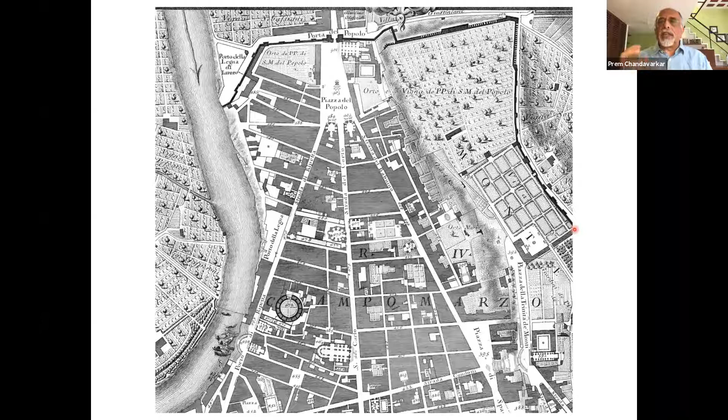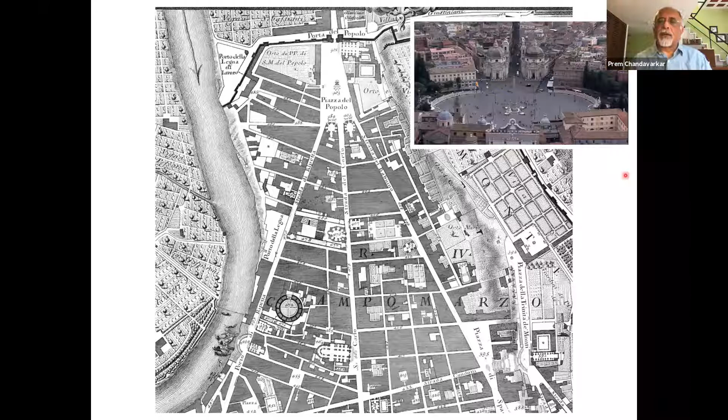So this is just an aerial view—those are the three roads you see. Later on, Pope Sixtus V, in the second half of the 16th century, started constructing obelisks at these major junctions to emphasize them further. So there was an idea of a grand street focusing on something of significance.

Now this went through another change initiated by the Protestant Reformation, which argued that the church had become a corrupting influence, that civilization had become a corrupting influence, and it was necessary to go back to humanity's original state before that corrupting influence took hold. So the Bible, which had so far been printed mainly in Latin, was translated into common languages. There's this notion of the Garden of Eden as a symbol of that original happy state. So this notion of nature representing this original state started to come in, and landscape design became a huge component in urban design.

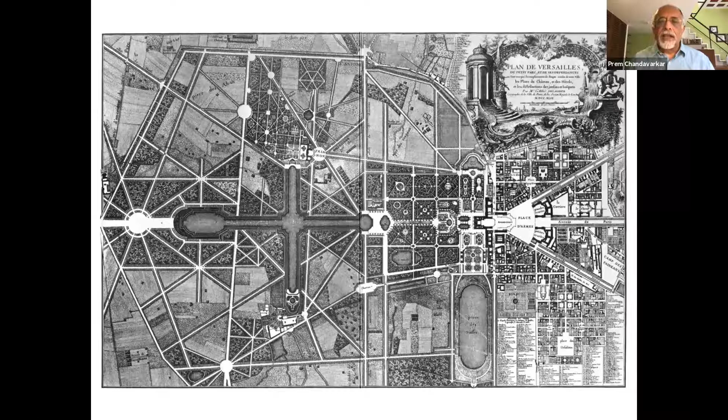Now, one of the grand urban axes, the first that set a precedent, was the Avenue des Champs-Élysées in Paris. This had emerged by the mid to late 18th century as a fashionable avenue that grew from the Louvre, which is currently a museum but was originally a palace, with a set of gardens in front. This axis had grown as a tree-lined boulevard, and it was quite well established.

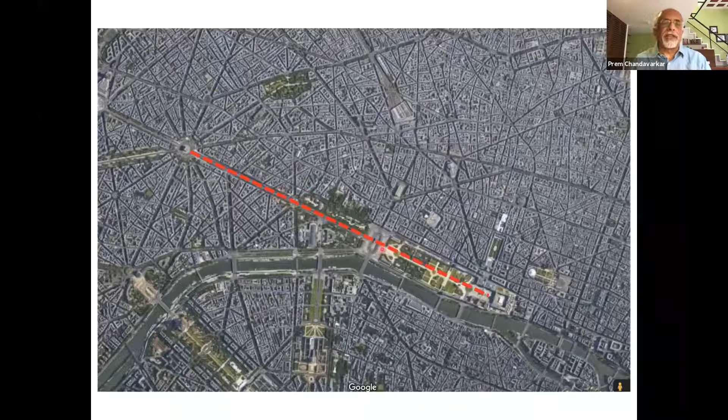But there was an intervention in Paris in the mid-19th century, commissioned by Napoleon III and designed by Baron Haussmann, who carved a set of boulevards into the heart of medieval Paris. This had two functions: one was to create this emphasis on monuments, which had become an established aspect of urban design; but it also made the movement of troops through the city for stronger control easier. This is the Champs-Élysées, and what Haussmann created was a major junction at the west end of it, with a whole set of radiating roads that had not existed before.

So that's a view of the Champs-Élysées. And if you look at what had happened, you had the emergence of the Grand Avenue, which had happened earlier, coming from the Louvre and the gardens.

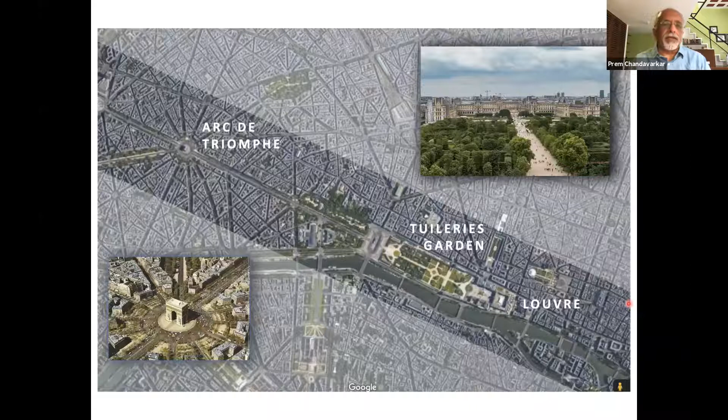But at the other end, in the early 19th century, a triumphal arch as a military monument to commemorate the people who had died in the French Revolution wars and the Napoleonic Wars was constructed at this junction created by Haussmann. So the idea of this bracketing of this grand boulevard with two edifices, at one end a palace or something that symbolizes governance, and at the other end a monument that arouses patriotic sentiment, was created. This set the precedent of the grand urban axis, bracketed by these two kinds of nationalist fervor edifices. And this was what dominated the making of capital cities from the late 19th century onwards until the ideals of the modern movement took over in the mid 20th century.

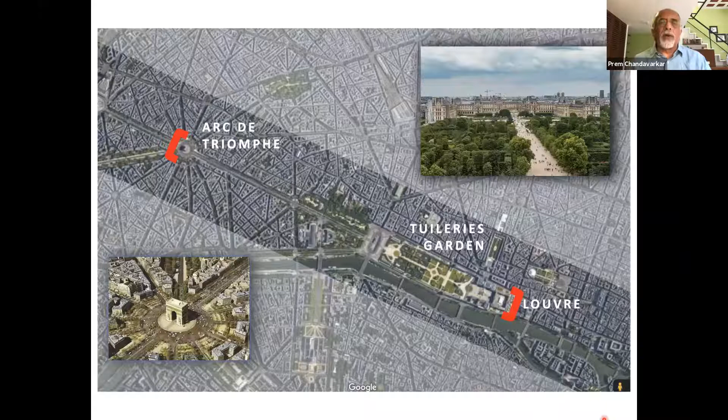The impact of the Athens Charter in the mid-30s, it started to prevail, and things changed. But the period we are going to look at here is the first half of the 20th century. And to do the comparison, I'm going to look at three grand urban axes in capital cities.

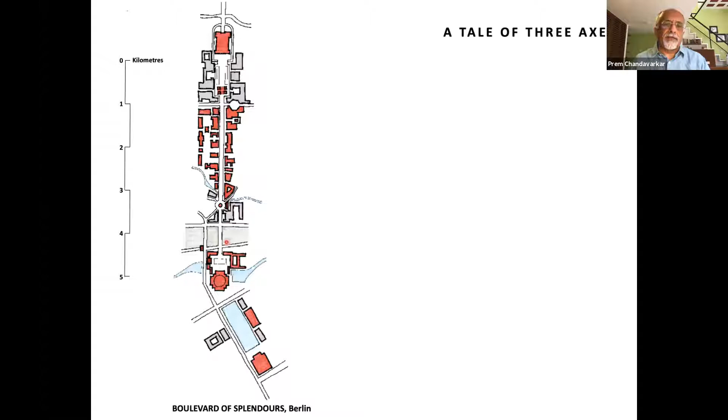The first is an axis that was never built. It was Hitler's plan to remake Berlin as Germania, which would be the grand capital of the Nazi Empire, and which would be a 7.5 kilometer long axis that would connect two new train stations. But the core of the axis was this stretch here from a triumphal arch to this domed structure.

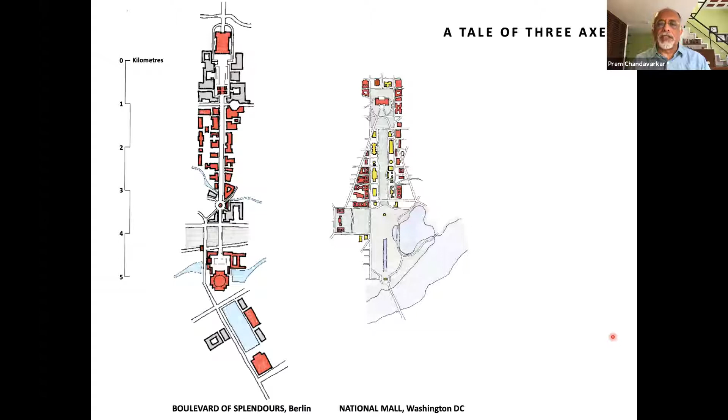The second is the National Mall in Washington, DC, particularly the way it was remade in the early 20th century. And the third is Central Vista, which was designed around 1913-14.

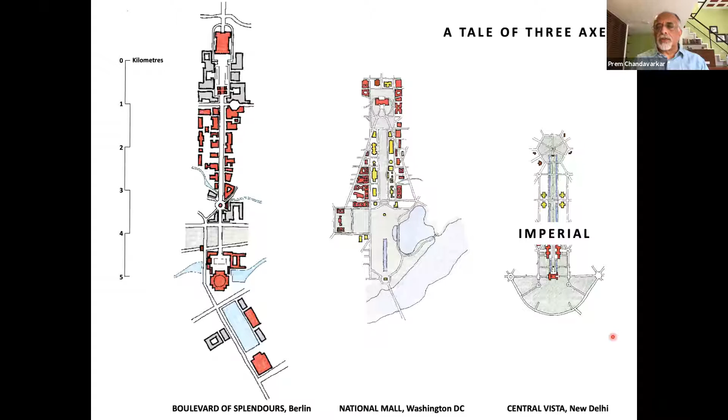So we look at these three axes. And the interesting thing is they come from radically different political regimes. Central Vista was originally an imperial project. National Mall was constructed under a democratic regime, and the Boulevard of Splendor springs from a fascist regime.

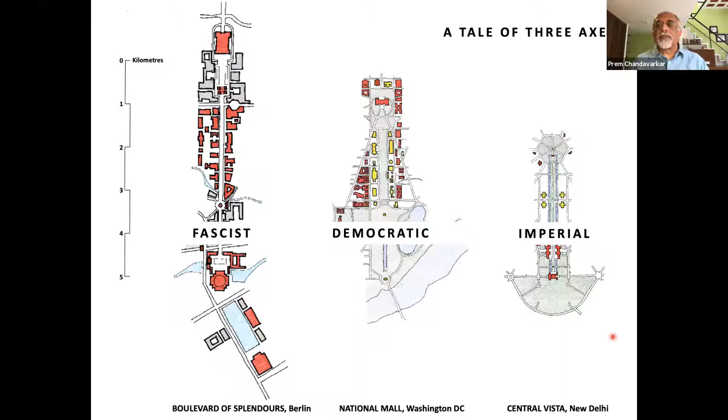Now, how is it the same urban type can be deployed for such different political ends? This is not in the nature of the type itself as a grand boulevard with focal elements, but how the constituents of that type are assembled and how they relate to each other. So for this analysis, we look at three aspects of the grand urban axis: what the focal elements are, what the edges are, and what the center of the axis is.

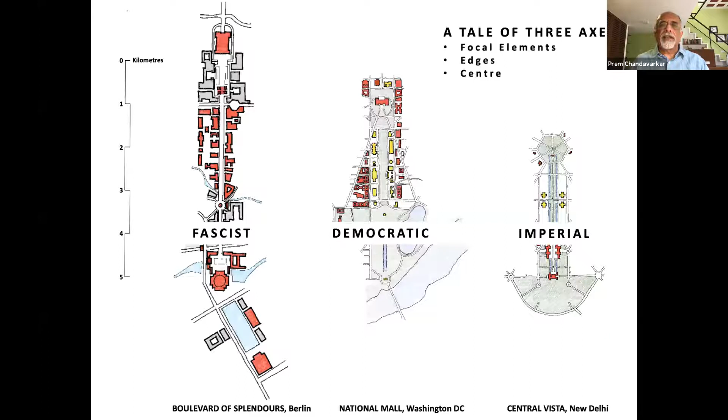So starting with the Boulevard of Splendors in Berlin. And that's the plan. This project was never realized because it had to be put in suspension at the start of the war, and then Germany's defeat in the war ensured that the project never saw the light of day. The only part of the project that was realized was the upgrading of Charlottenburger Chaussee into a grand avenue that terminated at a historical gate to the city, the Brandenburg Gate. And this street still exists in its upgraded form. But the rest of the project never happened.

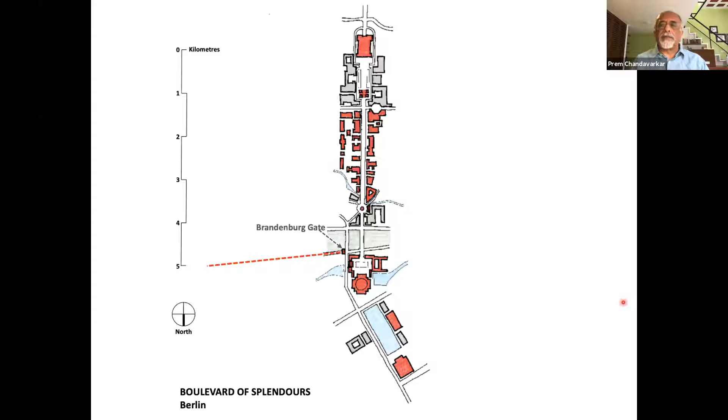So let's look at the focal elements. At the north end, and I'm going to look first at this core part of the axis, was this domed structure called the Volkshalle, the People's Hall. You don't realize the scale of it from this plan, but it was a massive structure, and the dome contained a space which was large enough to host an audience of 180,000 people.

The tip of the dome would have been 300 meters above the ground. It would have enclosed a volume that is 16 times that of St. Peter's Basilica in Rome. And if it had been built, it would still have been the largest single volume institution in the world.

The foreground for the dome, for the Volkshalle, is a huge square which was called the Great Square, which actually bridges over the Spree River. And there's a series of buildings that encircle this, the primary one being Hitler's Chancellery, and then the flanking buildings that flank either side of the entrance to the Great Square are the Wehrmacht, the Unified Armed Forces headquarters. And there was an earlier parliament building, the Reichstag, which is incorporated into this.

There's a garden immediately in front, and that's also an interesting gesture. Actually, the garden was there on the eastern side, but it was extended across. And this garden also still exists. In a way, there's a distancing between the source of authority and the rest of the axis, which sort of indicates that the authority is almost divine, is like one step above, away from the rest of society.

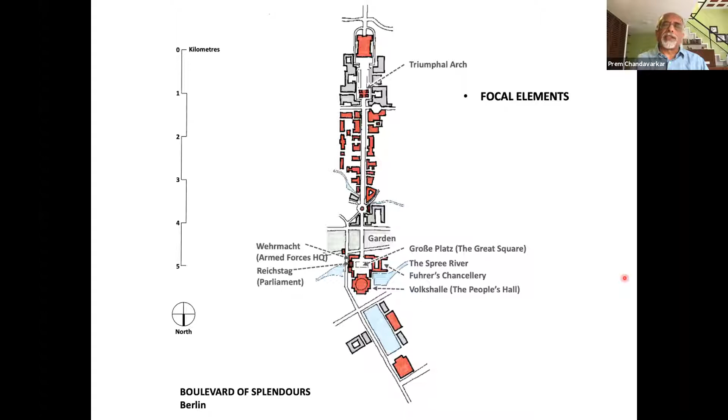The axis extends beyond on either side. On this side of the arch is a plaza of war victories designed to display large armaments captured during conquest. Then there is the South Station here. On the north, between the North Station and the Volkshalle, is a great pool, a huge, massive reflecting pool, so people exiting North Station from this side could get a double emphasis of the Volkshalle, seeing both the actual structure and its reflection. On this side is the City Hall.

If you look at the edges, it is constituted completely by government buildings. The core part of the axis is ministerial offices, and even these other buildings are all either buildings of government or of the military. The only public institution is the tourism center, and even that is a government entity, because propaganda through tourism was a key part of the Nazi machine, and this would inculcate people in the grandeur of the space. The location of the tourism center in front of the Soldiers' Memorial is significant.

If I look at the center, it is this boulevard, which is actually pedestrianized. Traffic is diverted into an underground tunnel. The military parades with a synchronized rhythm of jackbooted soldiers marching, that spectacle was a key part of Nazi propaganda, so this is basically what this was designed for. So even traffic was kept out of it, so you could really capture this in all of its splendor.

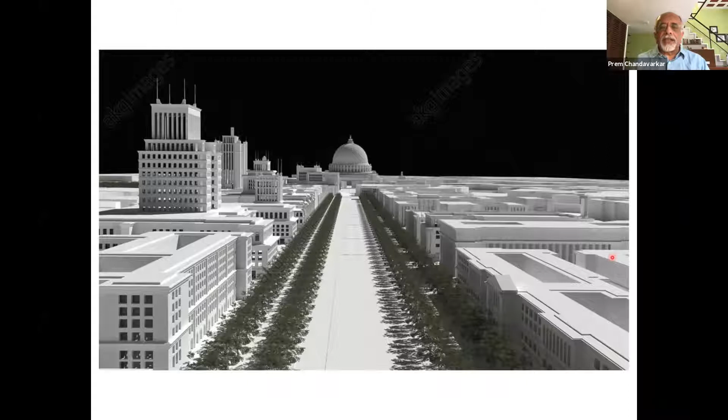You can imagine the grandeur of this thing, the immense scale, and the fact that it is completely lined by the buildings of state, of government. Clearly the intention here is to construct the spectacle of the state at a scale where the ordinary citizen is struck mute with awe looking at the grandeur of this. And the fact that they're struck mute with awe is something that they can take pride in, that they are citizens of that state. So it's a curious phenomenon of making the person proud but mute at the same time.

So let's come to the National Mall in Washington, DC. An idea of the mall was part of the original plan, but it was fundamentally reshaped. It was one of the boulevards slightly above the others, but it wasn't bracketed. It just went into the river as a focus. The idea of it being bracketed as a grand urban axis came only later.

This came from a plan released in 1902 by the McMillan Commission, officially called the Report of the Senate Park Commission. The McMillan Commission was chaired by Senator James McMillan, but he pulled in a who's who of architecture, design, and art. He had Daniel Burnham and Charles McKim of the firm McKim, Mead and White, who were the preeminent architects of the US, Frederick Law Olmsted, who was a preeminent landscape architect famous for designing Central Park in New York City, a highly reputed sculptor, Augustus Saint-Gaudens, and Charles Moore, who was Senator McMillan's chief of staff, became the secretary to the commission.

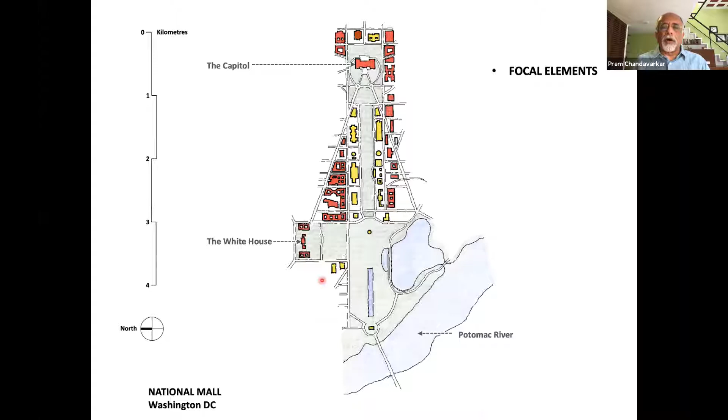So this is the plan. And if I look at focal elements, the focal element towards the east is the Capitol building, the legislature of the United States, which contains the houses of Congress and Senate. And it is interesting to note that the focus is on the legislature and executive authority is displaced to one side. The White House, which is the office and residence of the president, is on the mall, but is displaced off the axis. And the focus is on the legislature.

Beyond the Capitol building is another plaza, and closing off the east edge of that plaza are the Supreme Court and the Library of Congress. So one could say that the mall towards the east focuses on the triumvirate of legislative debate, justice, and knowledge.

On the western end, the focus is not a military memorial. It's a pavilion that commemorates Abraham Lincoln for having steered the nation through one of its most difficult passages in history, the American Civil War, where he managed to preserve the integrity of the Union of States while managing to abolish slavery, which was not an easy task at all.

Now let's get to the edges. At this section, all these buildings marked in yellow are all public institutions and containing art galleries plus some of the great museums of the world, the Smithsonian and many others. And this was actually a very deliberate gesture.

And there was a setback rule saying that no federal office building could come within 300 feet of the mall. And all of the federal office buildings are pushed beyond the 300 feet setback. And the idea for this is that as a democracy, it is the people who must be foregrounded and the government who are in the background. That is why the buildings need to be set back.

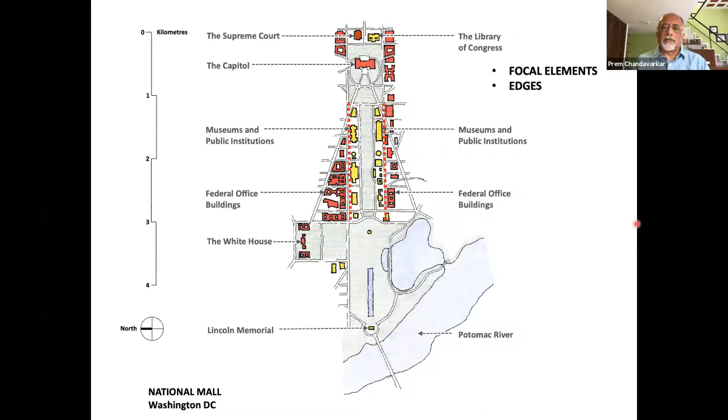There was a fight. The Department of Agriculture had supporters in Congress. The fight went all the way up to President Theodore Roosevelt, who finally supported what the government was aiming to achieve. And eventually the agriculture building was maintained, respected the 300-foot setback, and part of it was taken below ground so that it could be built within the height limit.

Now, the center is not a road for military parades, as has been the case in other grand urban axes. It is a park. And it's not even a park that belongs to the city. It's a designated national park and comes under the park services. It's called the National Mall and Memorial Parks.

And this park, to understand the importance of this park, one must look at what Jane Jacobs has written about parks. And she contests the old adage that the park is the lung of the city. She says the lungs of the city are the sort of 1 mile of atmosphere above the city. And it's not that parks breathe life into the city, it's actually the city that breathes life into parks. And she does a study of parks in New York City to show that where the park is surrounded by uses whose patterns change across the day, and there are continuously people going in and out of them, the park is lively.

Where it's surrounded by office buildings, where most people are indoors during the day, they desert the buildings outside working hours, then the park is not lively. If it's used at all, it's used during good weather, during lunchtime. But eventually it starts to decay and gets captured by crime and other forces of decadence. So you have to think about how you breathe life into a park.

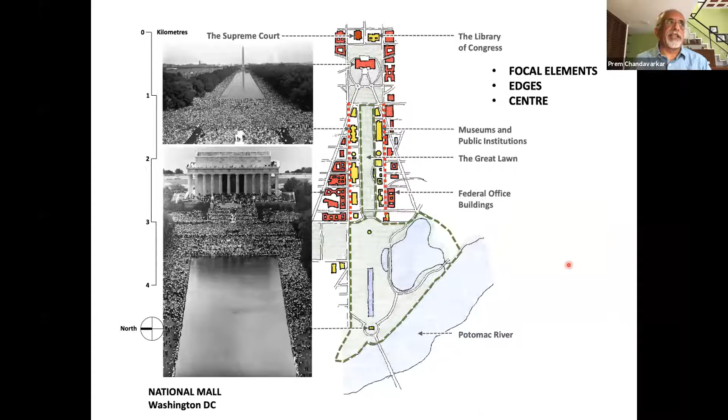This becomes a site of popular public protest, and that still happens today. There have been many public protests, but perhaps one of the most significant was the Great March on Washington in 1963 to fight racism, where Martin Luther King made his famous 'I Have a Dream' speech calling for the end of racism. This is an event that was significant enough that it's believed to have played a role in the eventual passage of the Civil Rights Act of 1964. So it's an epoch-making space.

The park has 3 segments. The middle segment is a tall obelisk, the Washington Monument, commemorating the US's first president. Towards the west, fronting the river, are 2 large water bodies, a reflecting pool in front of the Lincoln Memorial and a large tidal basin. Surrounding the tidal basin are Washington's famous cherry trees, where a lot of people travel to see the blossoms during spring.

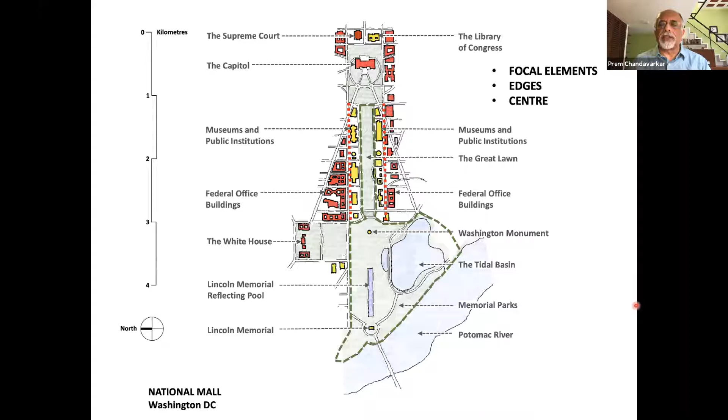These 2 water bodies all around are surrounded by a series of sites of public memory. Memorials such as the Vietnam War Memorial, the Korean War Memorial, the Franklin D. Roosevelt Memorial, the Martin Luther King Memorial, the Jefferson Memorial, and many more.

So now we come to Central Vista. What I'll do is I'll look at this in 3 segments. I'll first look at the original imperial plan, then I'll look at the current condition, and then I'll come to the proposed redevelopment.

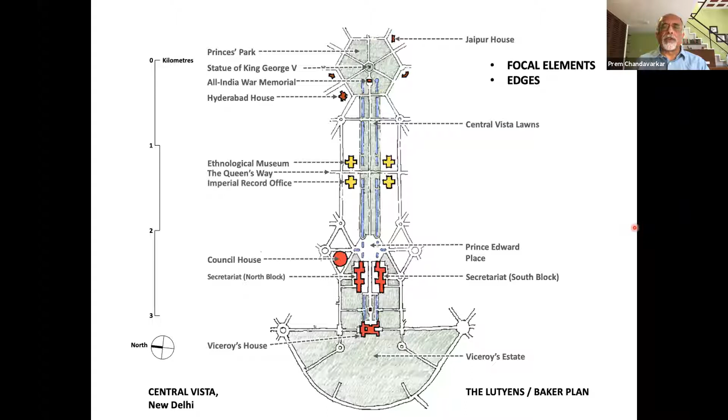But a key part is this central intersection, which this road was called the King's Way and this road was called the Queen's Way. And these four buildings were to be a culture hub. There was the Imperial Record Office, the Ethnological Museum, Antiquities Museum, and the Imperial Library.

And the center was supposed to be a processional boulevard where authority would march down in procession. There were a lot of articles in the British press glorifying this, saying how wonderful the spectacle of empire was, the spectacle of the viceroy coming down in his carriage toward his house, and people could watch him. So this notion of military parades, of processional spectacle, was a strong part of the axis.

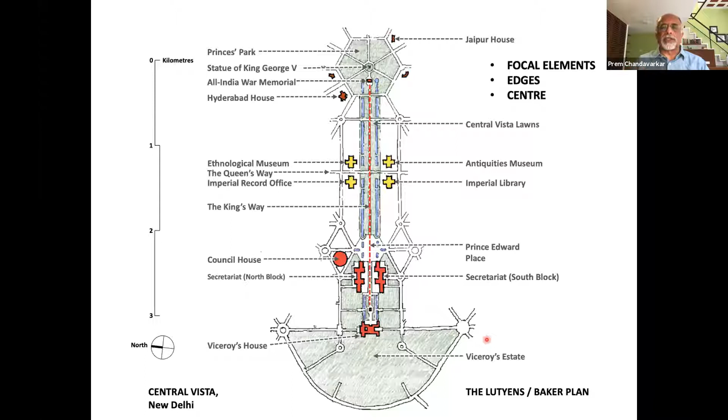They're lower in height, more disaggregated in form, broken up, and entered from the parallel roads on either side. So they're meant not to have a strong presence on the vista. The vista itself is meant to be this public landscape and this culture hub.

There were also plans, appearing in more versions than the cathedral one, that these buildings would be residences for senior members of government. So these buildings coming here would be even smaller and more broken up.

While this is a later photograph, I think what it captures in its focus captures the spirit of the imperial plan: the cupola, the triumphal arch, the Viceroy's house, north and south block on either side, the main lawns of the vista, and the water bodies and trees on either side of the water body.

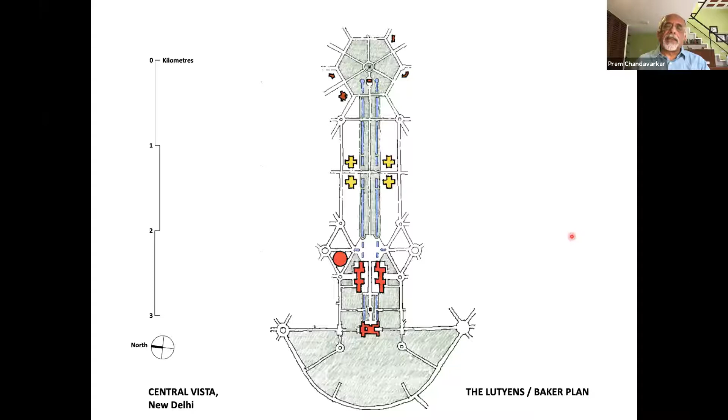Now, in its structure, the imperial plan sits somewhere between the National Mall and the Boulevard of Splendors. In terms of its focal elements, it represents the Boulevard of Splendors, although not at that megalomaniacal scale, with executive authority and military memory as the focal elements. But in its center and its edges, it is more the National Mall, because it sees the main core of the vista as a public landscape with public cultural institutions.

Now, this might have come out of British arrogance, because they viewed the colonization of India as a civilizing mission. That might very well be true, but the point is that at independence, we inherited an urban space that had as its core public landscape and public culture. That was the concept.

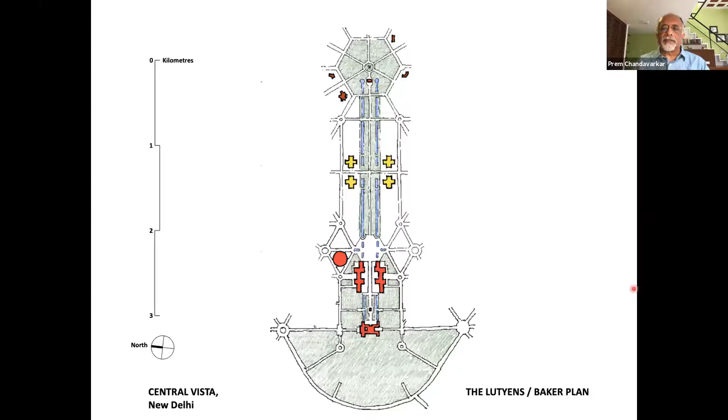So what's the current condition? The development since independence has been rather haphazard, and the original symmetry and neatness of the vista is lost to a certain extent.

The boating is allowed in the pools of the vista, and it gets renamed as the Boat Club Lawns. I don't know if it's ever been officially named that, but it's colloquially known as that.

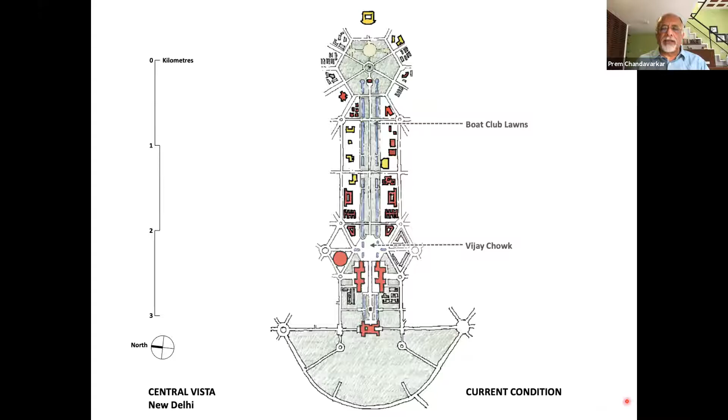This plaza gets renamed as Vijay Chowk, and I'll explain later perhaps why that name was chosen. The Viceroy's house becomes Rashtrapati Bhavan, the house of the president. North and South Block remain as the Secretariat. The Council House becomes Sansad Bhavan, the House of India's Parliament.

The King's Way gets named Rajpath, and the Queen's Way gets renamed as Janpath, the Way of the People. The All India War Memorial gets renamed as India Gate and now houses the Amar Jawan Jyoti, the flame commemorating the immortal soldier.

The statue of King George is removed from the cupola. At one time there's a proposal to put Mahatma Gandhi's statue there, but eventually the decision is taken to just leave it empty as a mnemonic symbol that the British Raj was once here, but was made to leave.

Some of the buildings around the Princes' Park get appropriated in different manners. Hyderabad House gets taken over by the government and becomes a space for hosting and entertaining foreign dignitaries.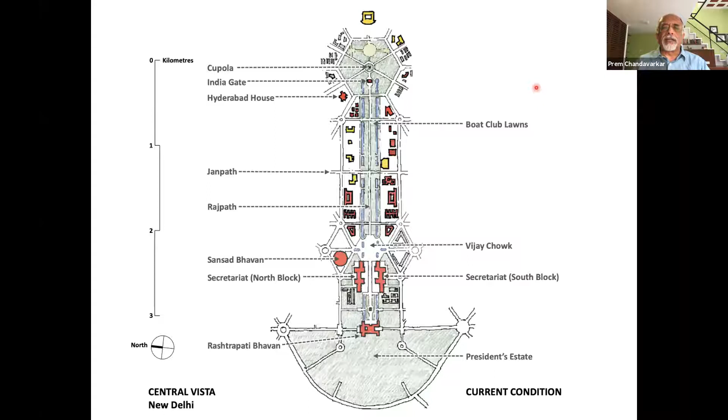Jaipur House gets taken over and extended as the National Gallery of Modern Art. Another building, Patiala House, is taken over as a courthouse.

But where structures have not been built, a series of ad hoc constructions and various bureaucratic buildings come up. One site gets taken over for army housing, and they come up around the hexagon.

Dhyan Chand Stadium is built towards the eastern end, and in the Lutyens' plan there was a proposal that the vista would be extended all the way east till it reached the Yamuna River. So now to do that visually is no longer possible because of the large stadium there.

More recently, a large part of the hexagon is taken over as the military memory steps in even more, and the National War Memorial is made.

Also, as needs increase, a series of ministerial offices are constructed over here in buildings that range in height from 5 or 6 floors, with a couple of them reaching 7 floors.

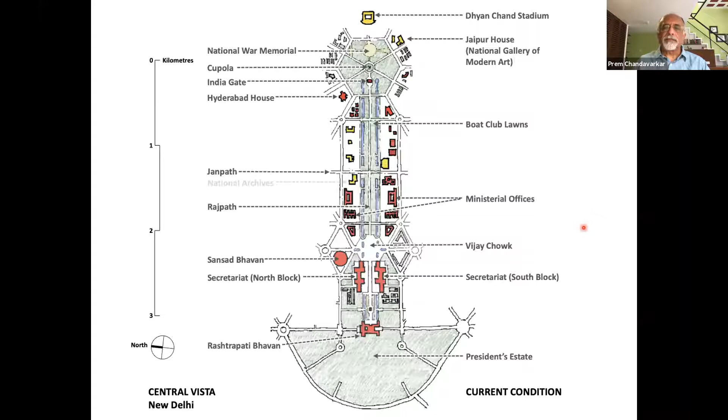What happens to the culture hub? The National Archives was the Imperial Record Office, originally built and preserved and renamed as the National Archives, extended slightly in a not very sensitive addition. The Antiquities Museum becomes the National Museum, but that comes only in 1960. So the cultural hub is getting preserved, but very slowly and in a rather ad hoc manner. The Ethnological Museum never happens.

This entire site is given over in the 1980s to the Indira Gandhi National Center for the Arts. An international design competition is held to design this. It is won by an American architect, Ralph Lerner. Only one segment of it is partially built, along with a couple of other temporary structures. So it's a project that's never been realized, but the plot has always been under the IGNCA.

Eventually, the culture hub gets compromised with government offices taking over, and this is something very recent. This building housing the Ministry of External Affairs was occupied only in the end of 2012, so it's less than 8 years old as a functioning building. And now the idea of the culture hub starts getting compromised.

Other structures come up, like Vigyan Bhavan, an auditorium which is the conference center for government functions. And some notion of the original Lutyens' plan, one of the proposals of putting residences for senior functionaries, is implemented, and the vice president's house is located here.

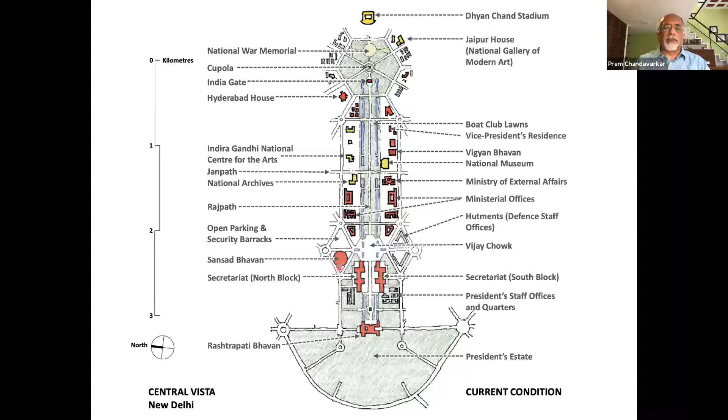A park which was supposed to be the foreground to Parliament House is appropriated, although it's never redesignated as not being a park. It takes on open parking for Parliament, security barracks that serve Parliament, etc.

When it's not a site of protest, it is a popular everyday landscape. Kids play here. The boat club, a celebration of New Year's at India Gate. It's a gathering space where people come and take selfies. There's a children's park created within the hexagon, and for many people who have grown up in Delhi, a strong part of their memory is coming here, having ice cream, buying balloons from the street vendors who have come up around there.

More recently, this is International Yoga Day, about 3 or 4 years ago.

I think this appropriation of the space was made easier by the architecture of the place, where Lutyens and Baker did not stay within an orthodox European classicism and adopted many Indian elements. So these buildings have chhatris, jharokas and chhajjas, and use red sandstone as a material, and domes. There was a sort of localized language that had some presence here, and that made the appropriation easier.

Which is why the 70 years of history in this space led the Heritage Conservation Committee of Delhi, a statutory authority to protect heritage, to declare it a heritage zone - not just a heritage zone, but a grade 1 heritage zone, meaning you're not supposed to be able to change it easily. It's not just that each of the monuments is individually listed, but even the precinct as a whole is listed. So what is seen worthy of protection is not just the monuments, but also their configuration and how they come together to make the precinct.

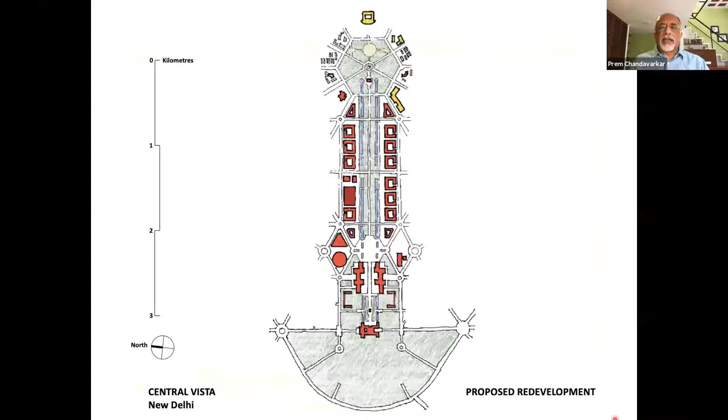So let's look at the proposed redevelopment, and that's what it looks like. Many of the elements from the existing condition are retained.

So what has come in? One is that Parliament will no longer be where the Houses of Parliament meet - the old circular building. There will be a new triangular Parliament building in the plot in front of it, and this will become an extension of that. A series of 10 donut-shaped, 7-story high office buildings housing all the ministries in a central secretariat are constructed.

Since Vigyan Bhavan is demolished, that's upgraded and a new National Conference Center is created here. This plot is taken over, and the Prime Minister's office, which had hitherto been in South Block, has its own construction over here.

Since the Vice President's house is displaced from here, these hutments in this plot are removed and the Vice President's house is put here. Although that was not part of the original brief, there is now a proposal to relocate the Prime Minister's residence to here.

The Indira Gandhi National Center for the Arts, which used to be here, is removed from the main vista and put off the vista, in one of the plots facing the India Gate hexagon.

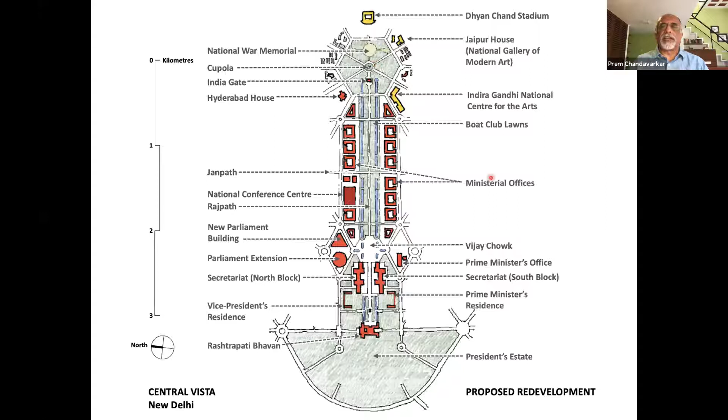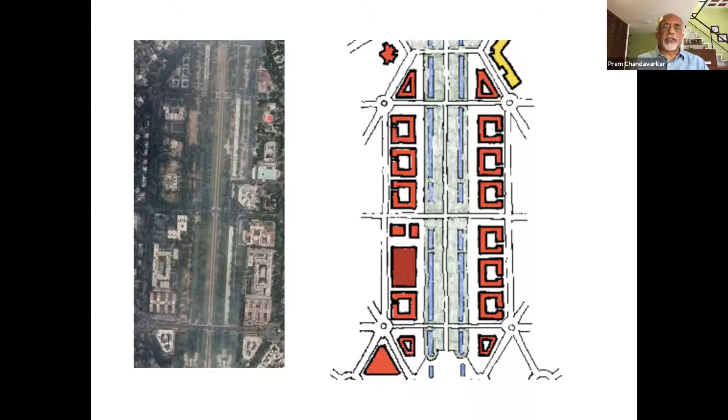This is just looking at the same section of it in plan. So you see that's the National Museum, that's the National Archives. Other buildings are more setback, except for the violation that happened in 2012 with the External Affairs Ministry. This section of the vista is all low-rise - that's the Indira Gandhi National Center for the Arts, that's Vigyan Bhavan, this is the Vice President's house. But it's no longer low-rise now, it is surrounded by 7-story buildings.

In one of the presentations of the architects, and I should mention that nothing in this is in the public domain - whatever I'm showing you is gleaned from screenshots made by certain presentations by the architect to fairly restricted audiences.

So in one of the presentations, it was argued that although these 7-story buildings are coming up on either side, you won't see them because the tree line, if you're looking above the top of the trees, will still define the horizon.

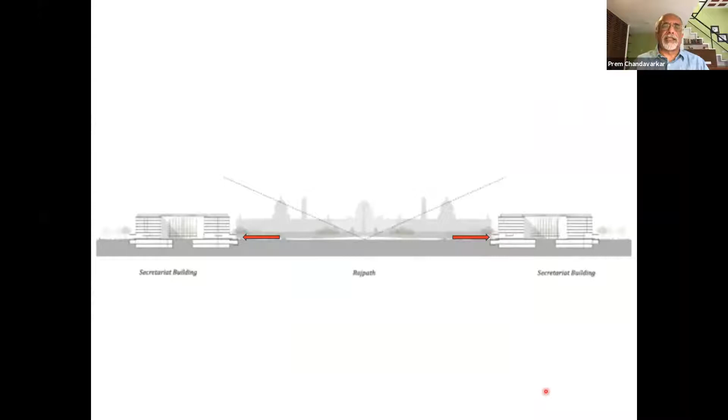However, this portrayal is shown from a single viewpoint, the center of Rajpath. The perception that's perhaps more important is how these lawns are experienced, where you look between the trunks of trees. Earlier there were a lot of gaps between the buildings, but now the gaps are largely reduced. So from the lawns on either side, you will sense this wall of construction.

But in the same presentation I was referring to, the architect claimed that the increase in working population of Central Vista is only 2%, going up from 50,000 to 51,000. That's because some 10,000 defense staff in hutments are being moved out of Central Vista, and 10,000 government employees from outside are being brought in. So it's only 2%. But the built-up area looks substantially more than a 2% increase, and this has not been explained. There are no area statements in the public domain, so we don't know what is happening.

One thing is clear: much more ground footprint is occupied by these buildings. A low-rise section of the vista is not low-rise anymore, and the average height of all these buildings is higher than the average height of the existing ministerial buildings.

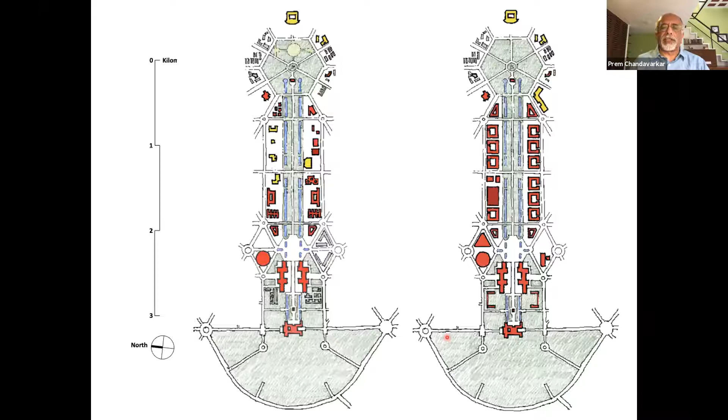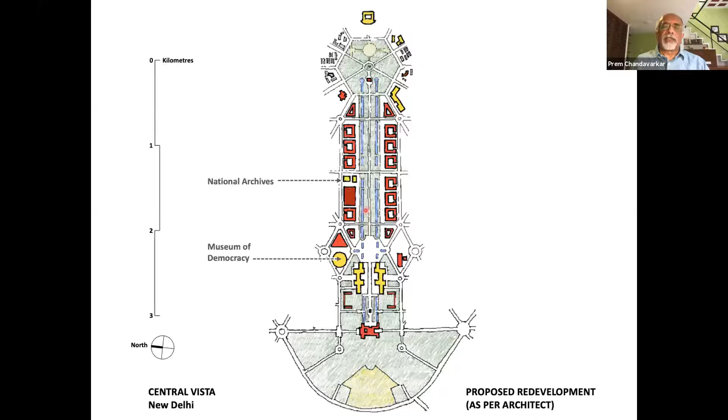There has been a proposal by the architect with some contradictions, so we don't know the true picture. In some early presentations, the architect said the existing parliament building would become a museum of democracy. But in more recent presentations, it's stated the National Archives building will be preserved in its current usage, and that North and South Blocks, since the Secretariat will move into new buildings, will be converted into the National Museum, which has been displaced from this site.

An arboretum has been created here as a public space, a biodiversity park, meant to put back some of the public space lost in the vista. Although this space is entered from Mother Teresa Crescent, west of Rashtrapati Bhavan, it does not form part of the spatial experience. So it really doesn't balance the public space removed.

Now this is contradicted by statements made by the architect, which are not backed by any statements from the government. In an interview, the architect was asked about this, and he rather ambiguously replied that he's made these proposals in many presentations to government and nobody has contradicted him. But there are pronouncements that seem to contradict these — for one, the Museum of Democracy is definitely not happening, and even the architect has stopped talking about that.

In the legal submission for approval of this new parliament building, it is clearly stated that this will act as an extension of parliament. In fact, there's an attempt to portray this new building as an extension of an existing building rather than as a new project.

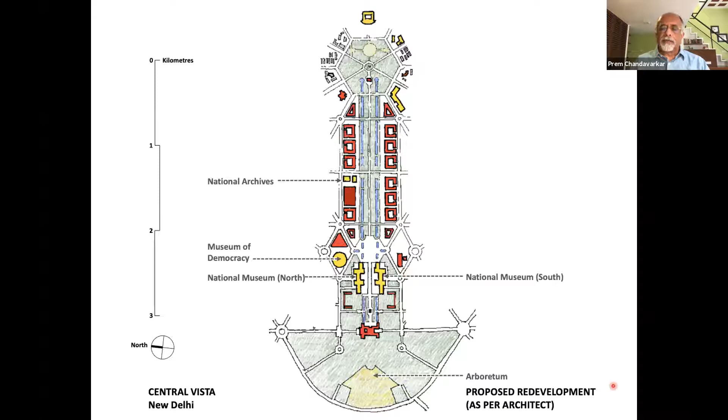But the other thing is that land use notifications to implement this project have been notified and gazetted, and these contradict the architect's claims. For example, this is the plot of the National Archives, currently zoned public, semi-public, but in the new land use, it is designated government office.

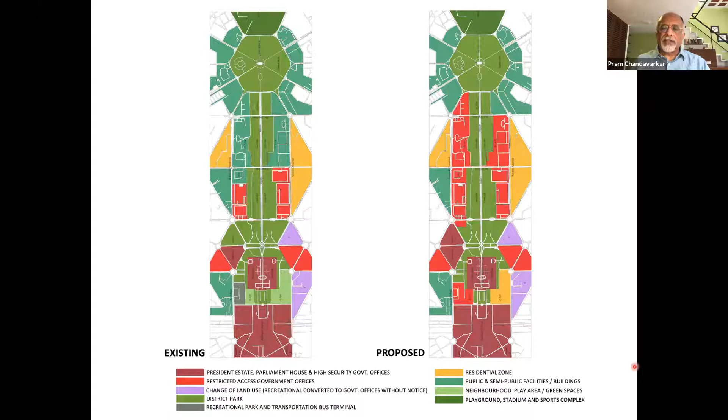This is the zoning of North and South blocks, which is high security government office, and it is still preserved as such in the change of land use. These plans don't show the site for the arboretum, but the land use change shows no proposal to create a public space here. So in the evaluation, one has to give greater weight to legal pronouncements of government over remarks made by a private individual in informal settings. One cannot take those proposals into account.

So what does the redevelopment portend? Let's conclude with that. If you look at the current condition, there was a choice in the original imperial plan to preserve the center as a public landscape. We could have gone more towards that, which would be something in empathy with the National Mall in Washington. However, we have chosen to displace all public institutions from the space, make it completely a space of government, and make the visual spectacle of government dominant in the space.

So we seem to have made a choice to move more towards the Boulevard of Splendors, the German example from the Nazi era. I'm not saying it is a fascist turn, but it is definitely a more authoritarian turn, or it seems to be one, just looking at the design.

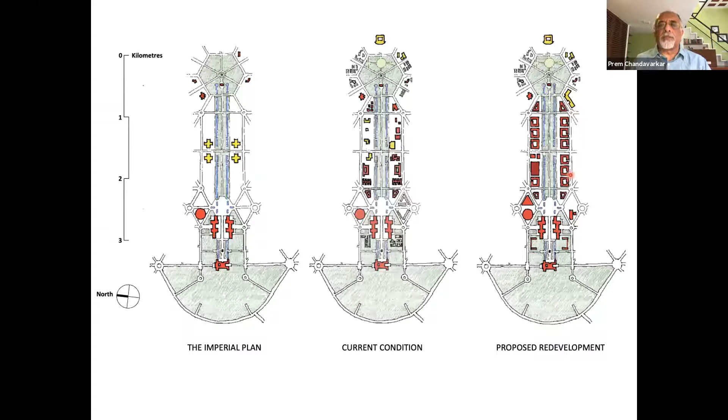To validate whether it is such a turn, we also have to look at the project process. Let's revisit the benchmark that the National Mall set: consultations on democracy and architectural ideas before starting design, benchmarking with the best practices in the world, putting everything in the public domain for comment before ratifying it as a project, and debating it in the legislature prior to ratifying the project. But here we have some procedural gaps which seem quite profound.

There has been no public discussion on what vision of democracy this project should represent. That vision should have formed a strong part of the architectural design brief, whereas the architects were just told, you interpret it. They were given 3 weeks to submit their proposal. That was the time given to articulate the future legacy of democracy in India.

This project, which completely reshapes the spaces of parliament, has had no parliamentary debate, no parliamentary sanction, no discussion on what the project should do. It is typical for projects involving parliament to be subjected to the oversight of a joint parliamentary committee. There have been 2 earlier joint parliamentary committees constituted to oversee all projects of parliament. The last one was sort of disbanded. It has never met after the 2019 election.

Thank you so much, that was an absolutely remarkable synthesis. That's also making such a compelling case, and often made the blood boil while seeing the presentation of a proud but mute citizen.